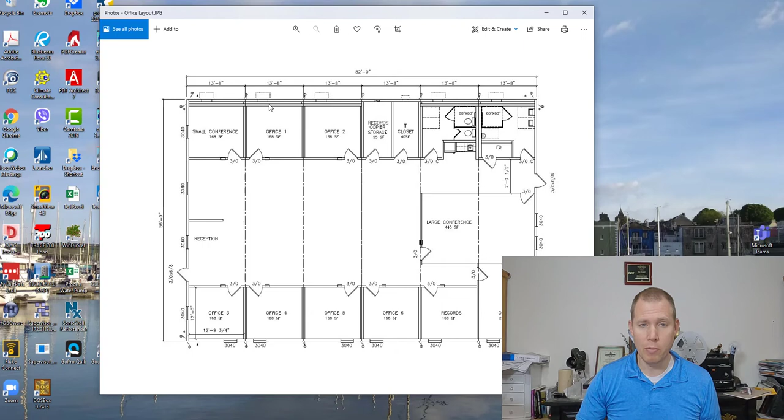It's a small office type building, 6 modules joined together, and we have 5 units. One at the top of module 1, number 2, number 3. The one on number 3 is handling double duty. It's doing modules 3 and 4. Then we've got 5 and 6, each with their own unit. And the way we're showing them, they're just going to be Bard or Marv Air units.

So the first step I go through in sizing this is I do the load calculations. Now you may use Manual J, I use Trane TRACE to do it. Hopefully you're not just guessing.

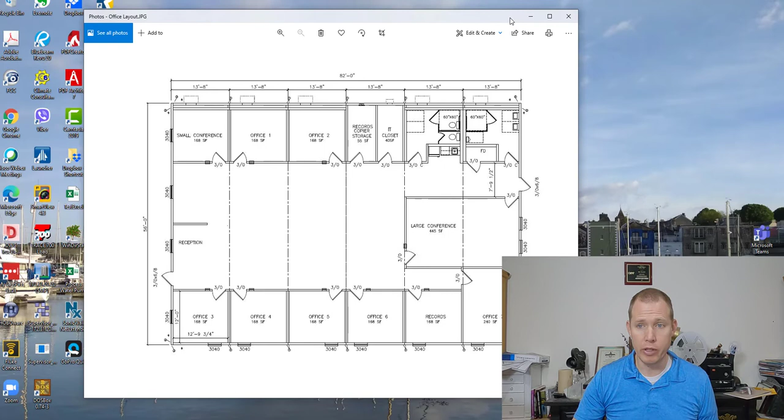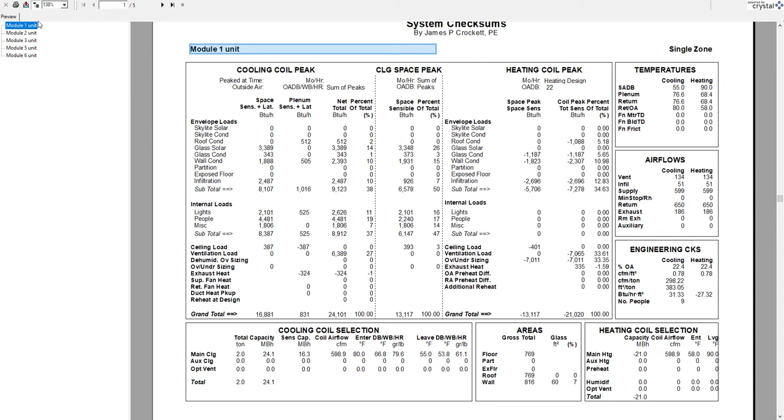So after we've run the loads, we're going to look at the output. What we can see here is module number 1 needs, at a minimum, 24,101 BTUs, which comes to 2, but I'm going to round this up to 2.5 just to make sure the unit can do it. The next one is 1.4. I'm going to round that up to 1.5.

Module 3, this is the one that's doing double duty. We're going to put a 3-ton here. Number 5, this is going to be a 1.5, and number 6, a 1.5 or maybe a 2.

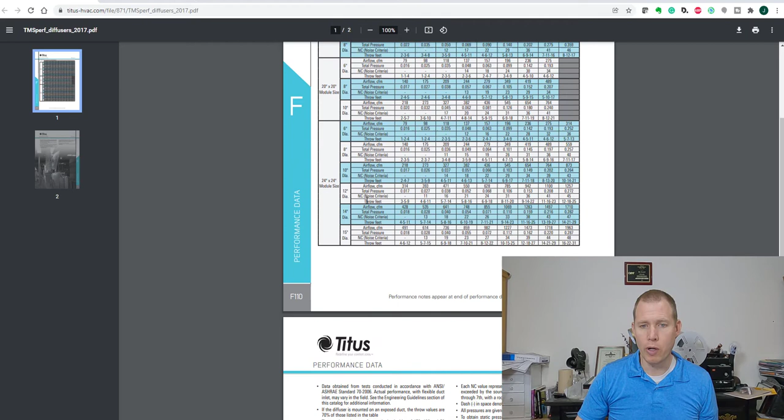A little further down, we've got diffuser sizing. And here you can define at what CFM you want to transition from one diffuser to another. I based mine on the Titus TMS 24 by 24, and I sized it around roughly 0.05 pressure drop at the diffuser, which means a 6-inch will get us up to about 140, an 8-inch up to 245, 10 to 380, and so on.

Next, I'm going to pick the unit. I think I said with the first one we were going to go with the 2.5-ton unit. Bard and Marv Air units put out about 320 CFM per ton. If I were doing a more traditional unit, I could put in 400, and you'll see that the trunk CFM varies based on what I put in here. I've also got a slider to adjust the tonnage of the unit. I'm going to go with the 2.5.

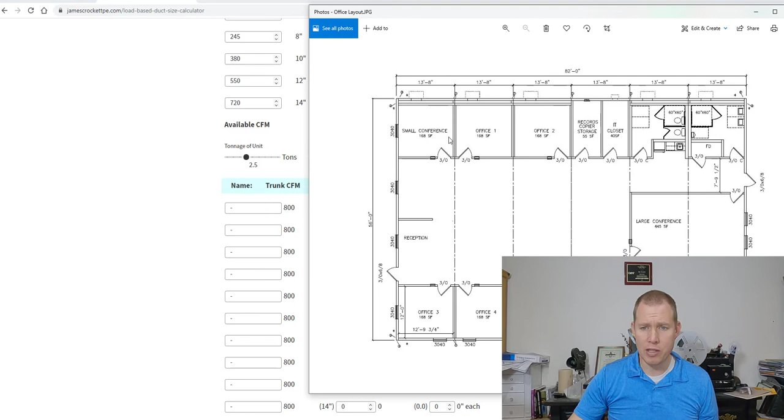Okay, so to start off, our first one, we've got a small conference room, reception, and office 3. So I'm going to type in small conference.

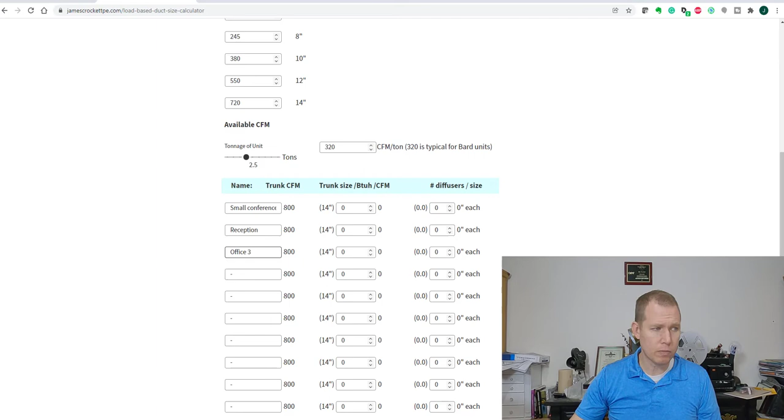Reception, and it's also called open office. Office 3. And then, also from the load calculations, what I want to pull up is the peak cooling load summary. And so what this does, it goes through each room in our system, provides some summary data, and the column we're really interested in right now is the space sensible load.

This is how many BTUs of sensible load there are in the space. We don't worry about latent when we're distributing air. We worry about it when we're sizing the unit, because that's where the dehumidification happens, back at the unit. But right now, this is the only part that we care about. So let me switch back to our, you know what? Let me make this skinnier here. It's acting a little funny on me. All right, here we go.

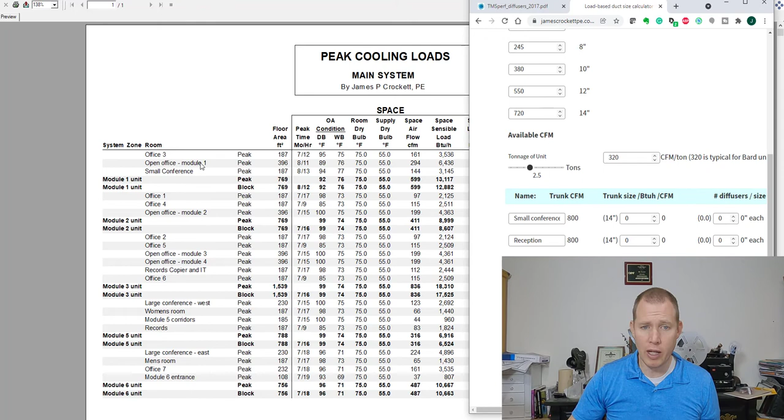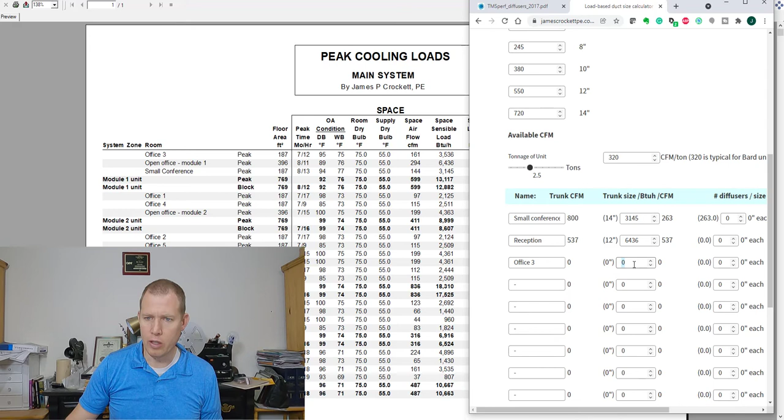So small conference, 3145 is how many BTUs. The second one, that open office slash reception area, is 6436. Office number 3 is 3536. Okay, I'm going to max it back out. And what it does is it calculates how many CFM I'm going to want going into each space.

So if you've got a test and balance requirement as part of your project, this is the number that you put in. Usually I'll round it to the nearest 5, just so that the test and balance person doesn't think I meant it's got to be dead on 192, that 190, 195 is okay. Then over here I tell it how many diffusers I'm going to use to get the job done.

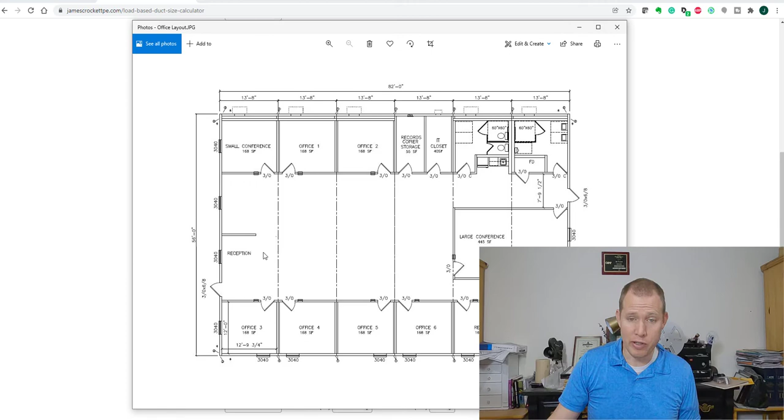Okay, and so for example, for reception, I could either put in one big 12-inch, or I could have two 8-inch ducts in there. If I have two 8-inch, then maybe that's what I'm going to go with. And the trunk line is 14 when it leaves the unit. It stays 14-inch after it comes off and goes past the small conference. It stays 14-inch until it's picked up reception with those two ducts, at which point it drops down to 10-inch, and then you end up with a little 8-inch branch coming off of that 10-inch.

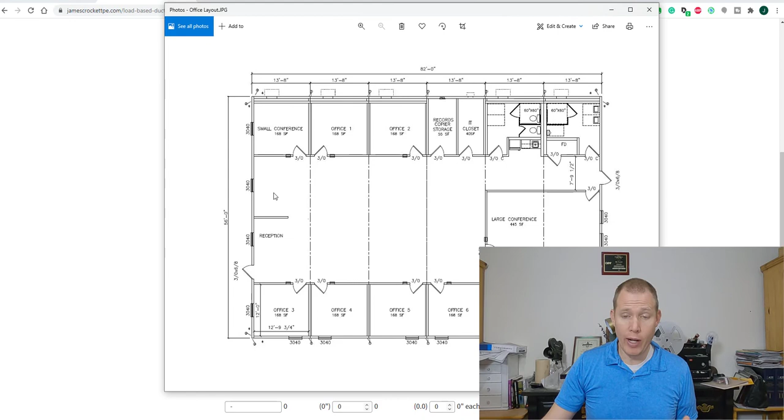Well, you may wonder why we don't just run an 8-inch the whole way out, and the reason has to do with, you know, we don't want to have excessive pressure drop as we're running through the ceiling. We want to keep it full sized. When you get to the diffuser, it isn't strictly a matter of pressure drop, as I alluded to. That's what I'm using it for. But the max CFM of the diffuser also has to do with the spread, the coverage, etc.

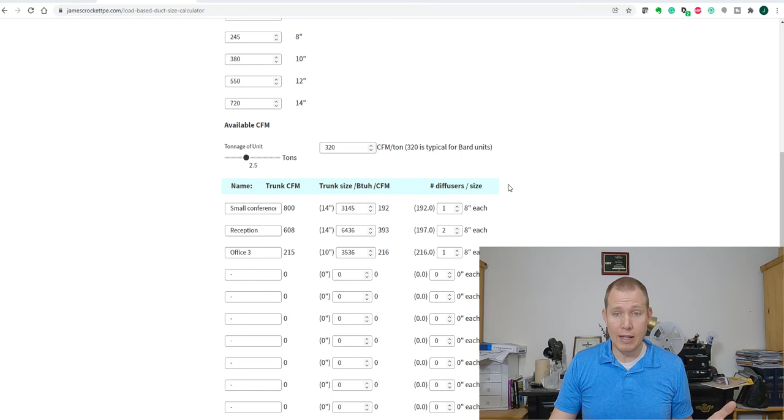So it's 14 inches. 14 inches reduces down to a 10, and then you've got an 8-inch branch coming off of it. That's it. That's all there is to it. This has everything sized for you now, and if you want, you can print this sheet off and hang on to it for your records. That's all there is to it.